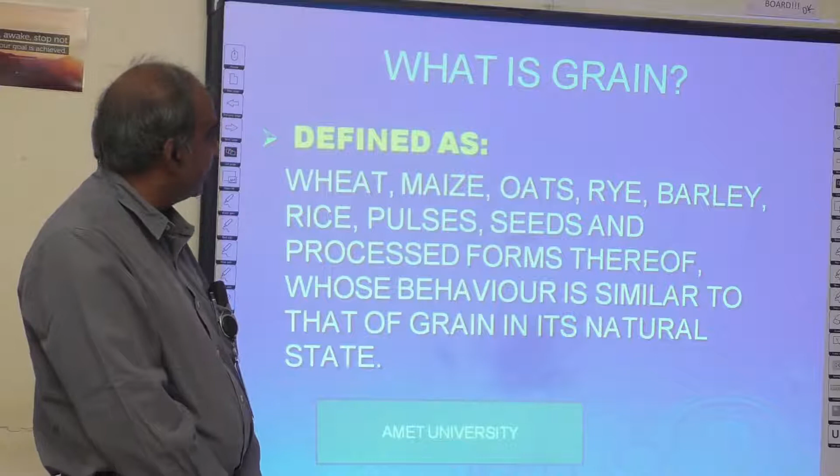Legislation. If you want to know how to load grain, IMO has got a book called International Code for Safe Carriage of Grain in Bulk. You simply follow this book and you are loaded safely.

The big question is interpreting this book. You should understand what he is trying to say and how to apply it on various types of ship.

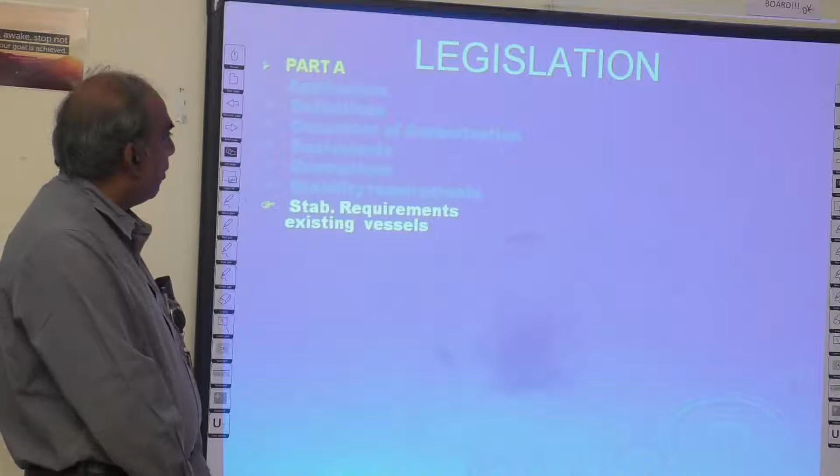Now, this book contains part A: application or definition, what are the documents required, what are the equivalents in case you want to load, what are the exemptions following this rule, what are the stability requirements in following these rules. And all this is part of your legislation contained in part A.

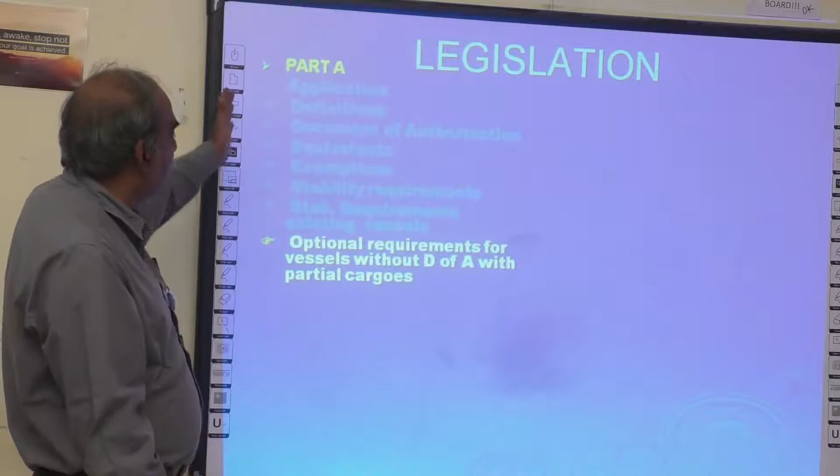In other words, if you refer to International Grain Code part A, it will discuss what are the documents, what are the stability requirements for loading grain in detail.

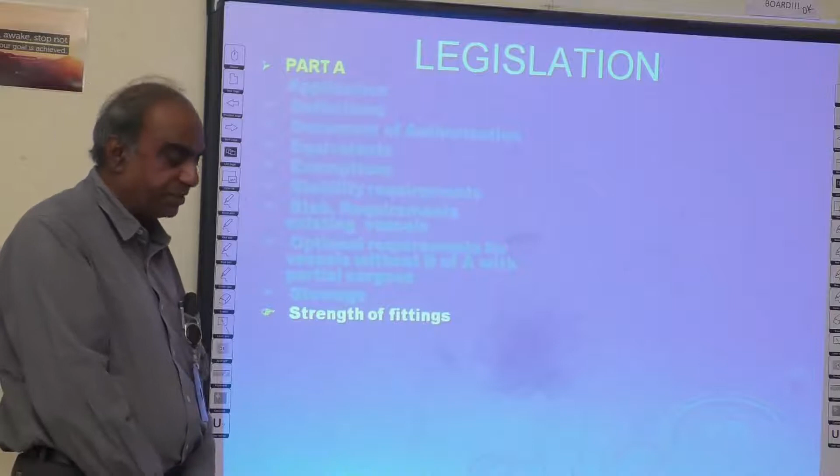Next, how do you stow this grain? Stow means placing the cargo. Securing means tying up the cargo. Grain in bulk carriers may have to be secured, that is tied up on the ship, so that if you tie it up, you may not have serious stability problem. So you are literally securing or tying up this grain, which is also discussed later.

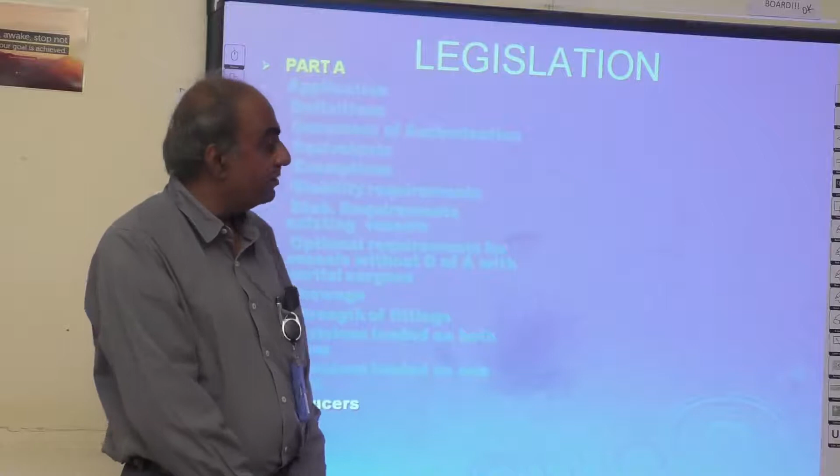What are the various methods of securing this grain? It's also discussed in the International Grain Code.

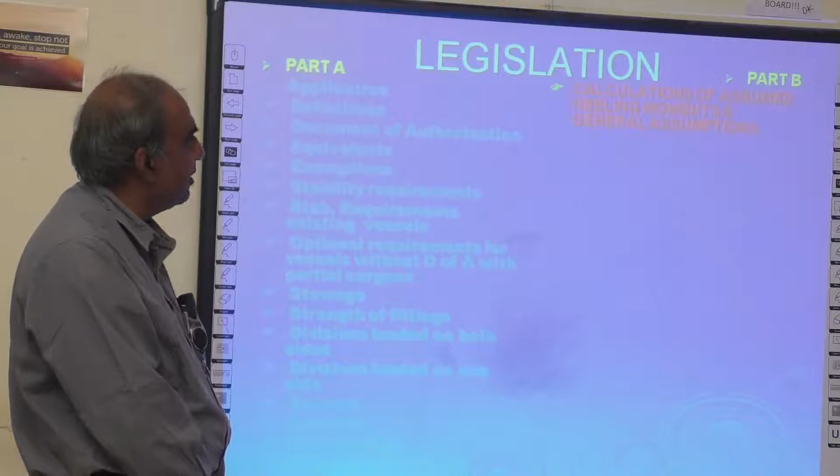Part B again, whether you have sufficient stability is discussed in part B, and part C is the carriage itself.

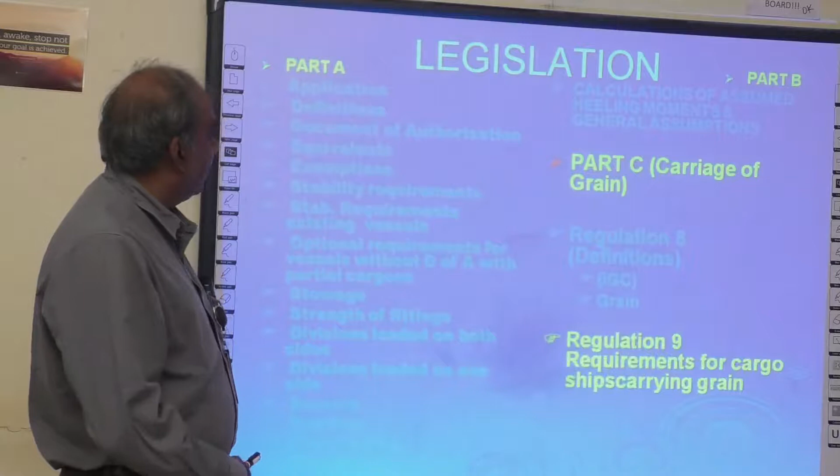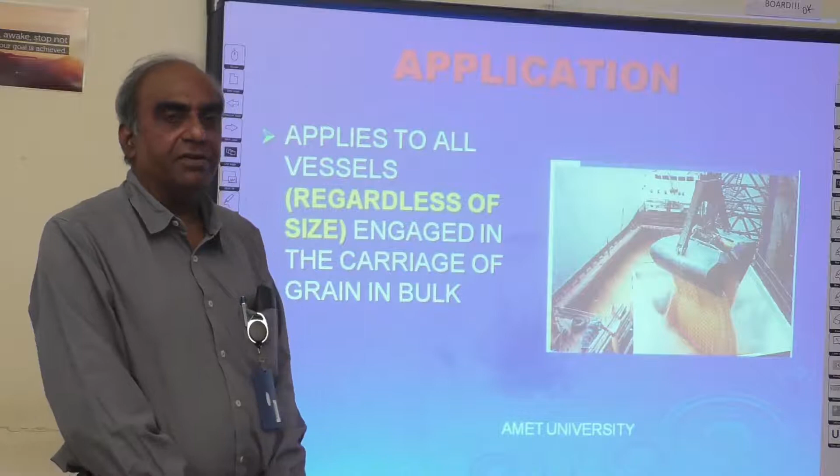Application, which ship it applies to. You will see that carriage of grain applies to all ships, regardless of size. That means, whatever be your gross tonnage. Certain rules you will see in IMO regulations applies only to ships of so and so meters, applies only to ships above 500 gross tonnage. But in case of grain, you can see, regardless of size, it applies to all ships.

What are the documents required for carrying grain? You require a document called document of authorization. Now, what is the meaning of this document? Your flag state or administration says that the ship is suitable to carry grain.

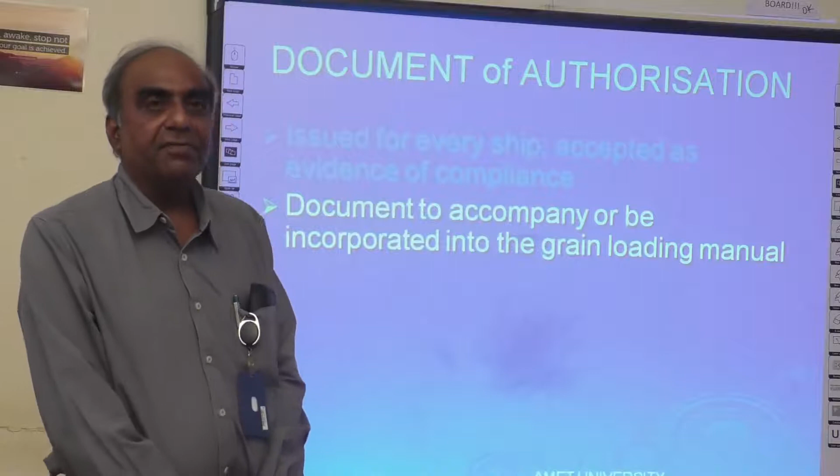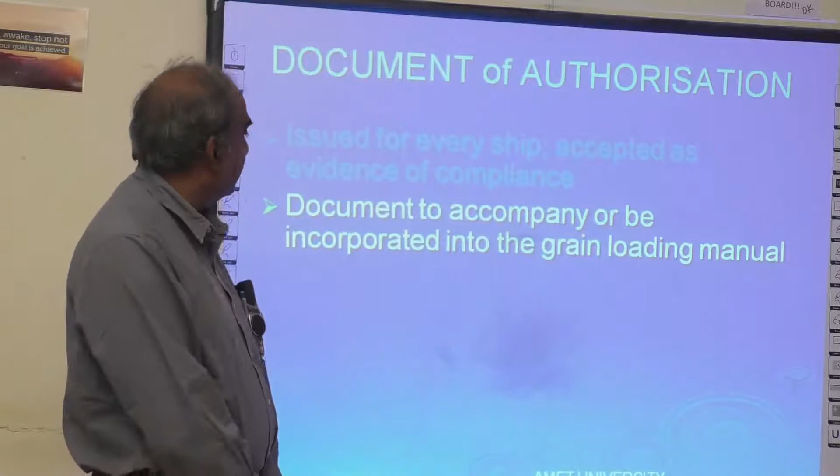Then you require a manual called grain loading manual, which basically gives you how you load the grain in each hold, and after loading, what kind of stability conditions you reach. That is called grain loading manual.

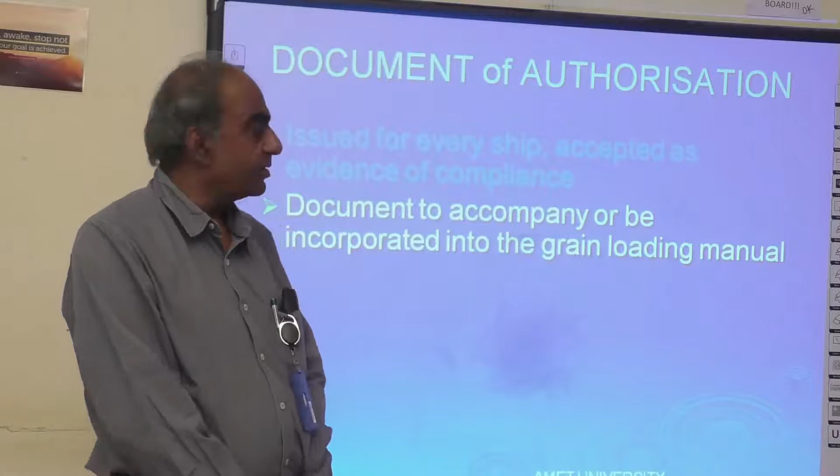It must be in English or French. I have also got recognized languages, not only English, you can also have it in French.

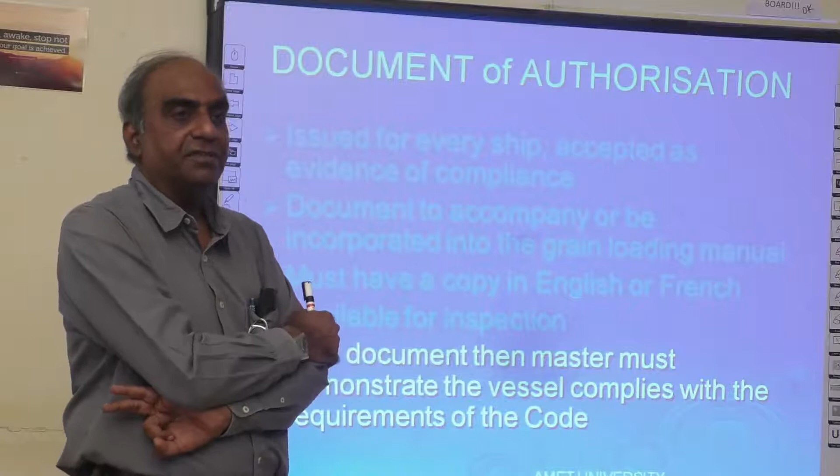If you don't have the document, can you load? The simple answer is yes. Master can load, provided he can prove to the administration that he is able to meet all the requirements which is given in the regulation, international code. Good, next.

Stability. In the loading manual, you will find everything related to stability of the ship. What are the particulars of the ship? What is the displacement? What is the free surface correction?

And the angle of flooding, hydrostatics, cross curve of stability. In other words, it is called the GZ curve or righting arm curve, which is a critical curve for your ship. From that curve, you can have an idea how your ship's righting arm and GM are behaving. That is called cross curves of stability.

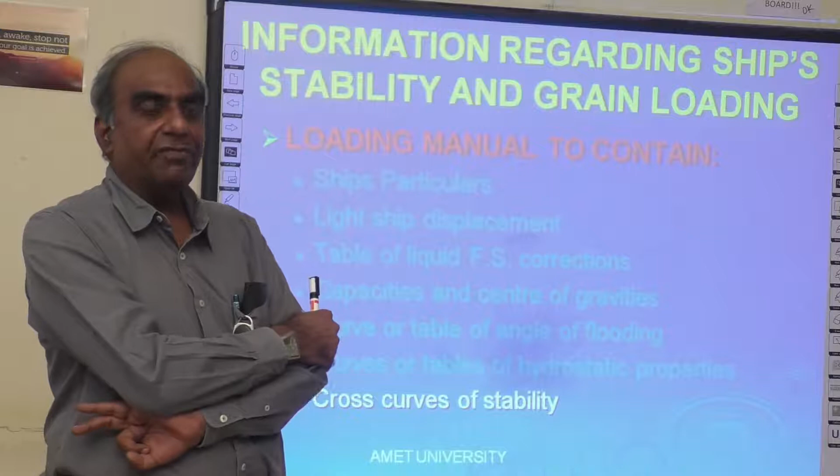There are various cross curves: ship with angle of loll, ship with negative GM, ship with positive GM. These all have got cross curves of stability. And from that you will have an idea what is the criteria for your ship as far as stability goes.

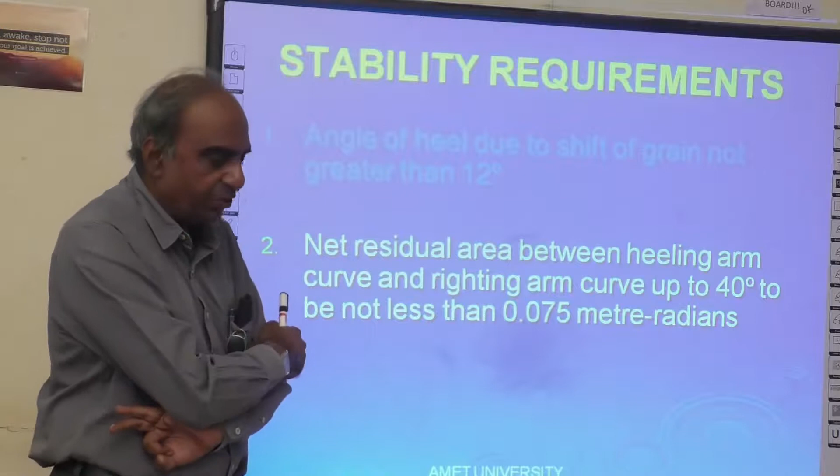So what is the stability requirement? If you load grain, you have to prove that after loading the grain, if the grain shifts - grain will shift, why will it shift? Because it settles. That is the biggest hazard of grain: whatever grain you load, it settles by itself after a voyage of about 10 days due to ship's vibration, by about 2%.

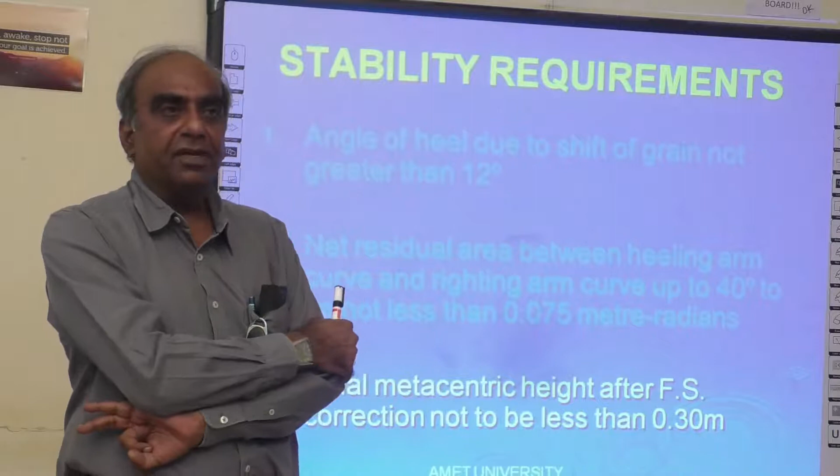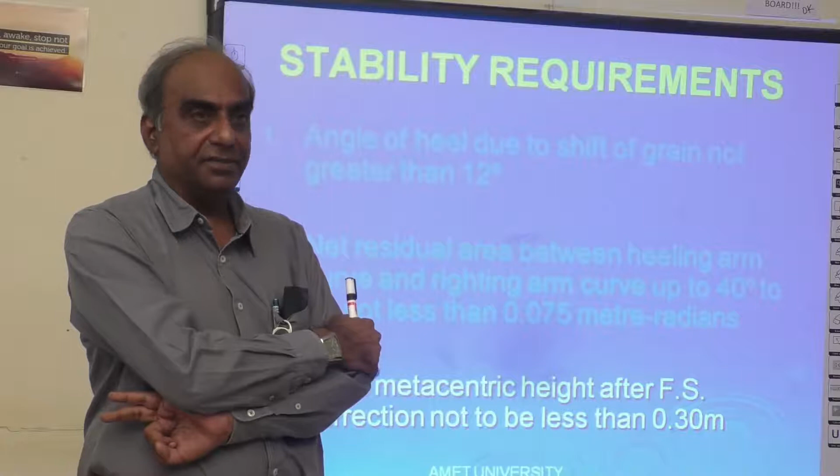That is why you assume your grain will shift. Assuming the grain shifts, I should be able to prove that my ship will not heel more than 12 degrees, which I can prove with the curve of stability, with the righting arm curve, the heeling arm curve. I will show you the cross curve of stability.

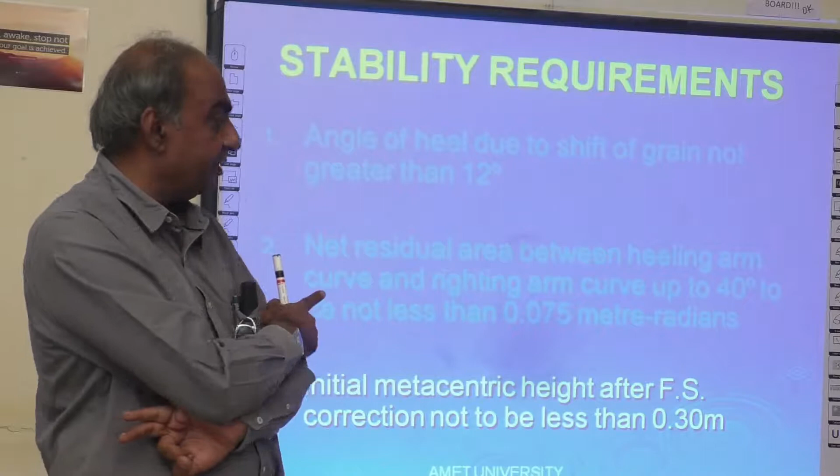And I should always have a minimum of 0.3 meters GM. Normal cargo ship requirement is 0.15, but in the case of grain, you require to have 0.3 meters, and that's after allowing for free surface.

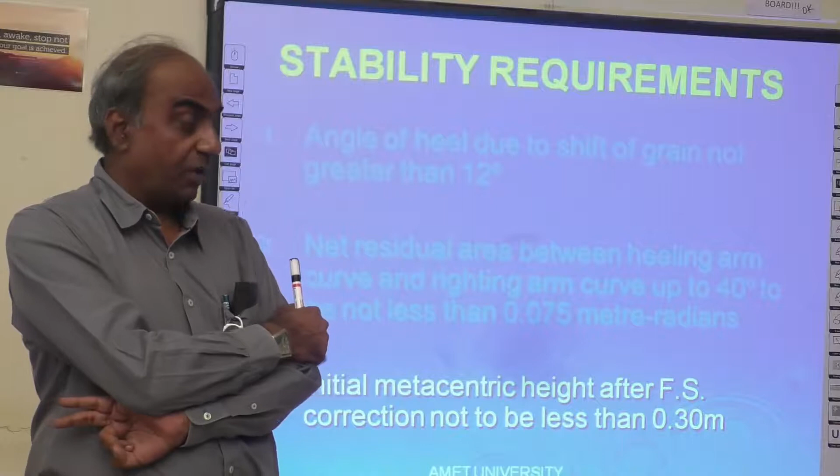Now you might ask, why is grain hazardous? Number one, it settles by itself. Number two, because it settles, it leaves empty space and creates free surface. If it is not settling, half your problem is less - you will have no free surface effect. And grain behaves like a liquid.

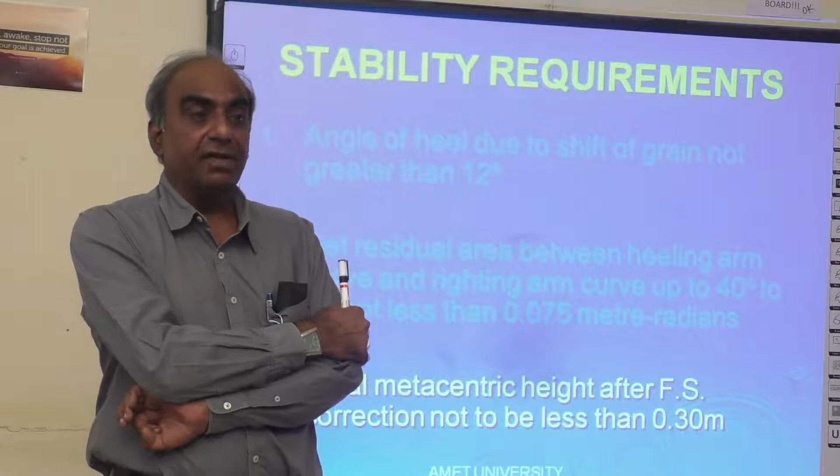Liquid itself is harmful to the ship when it is partly filled in a compartment. Therefore, a partly filled liquid tank is very dangerous for ship stability because it creates free surface effect, reduces your GM. Imagine grain itself is a cargo which can be considered a liquid. Although we are very familiar with wheat and rice, carrying wheat and rice can be very hazardous if not loaded properly on the ship.

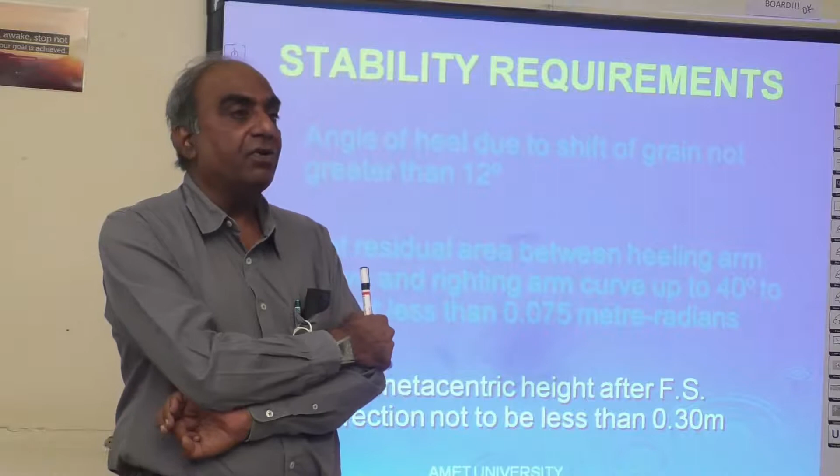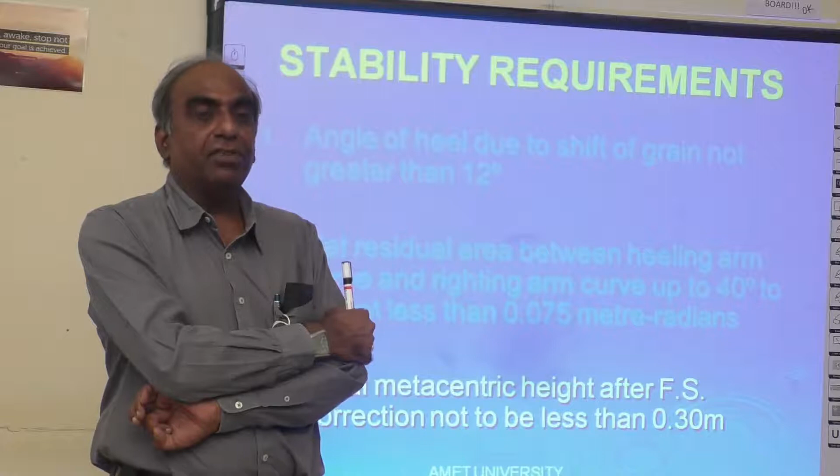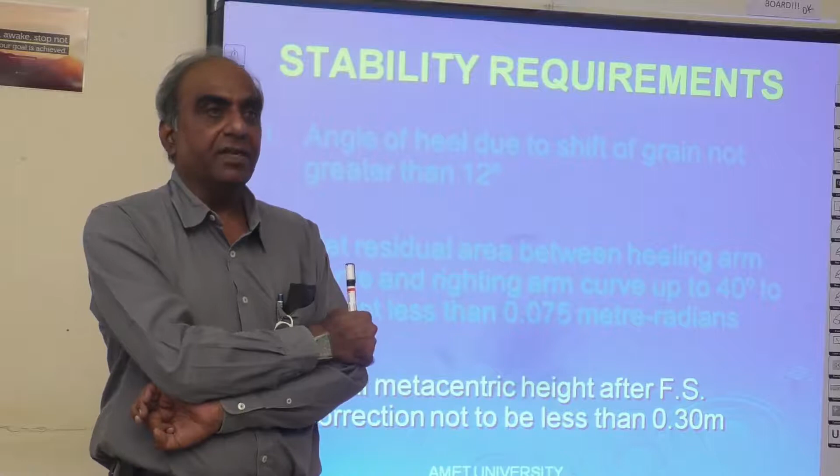Therefore, the main hazards of grain are settling of grain and shifting of grain. Both are hazardous for stability. The only way you can prevent it settling is by securing the grain. The only way you can prevent it shifting is again by securing the grain, unless you are a ship specially built to carry grain.

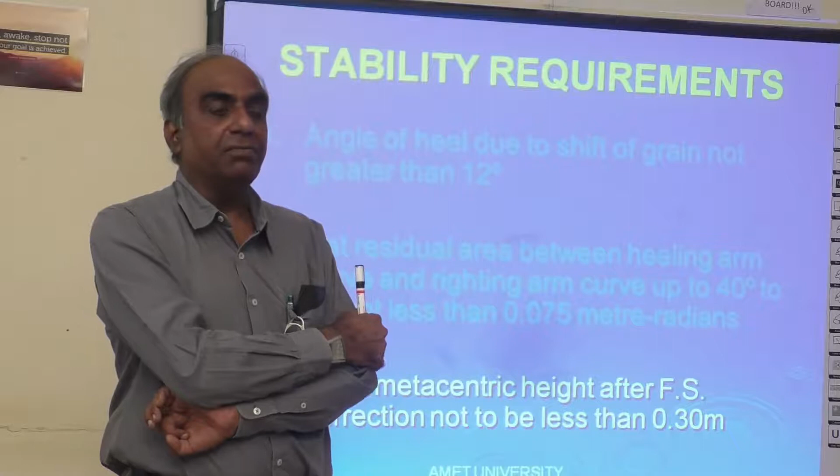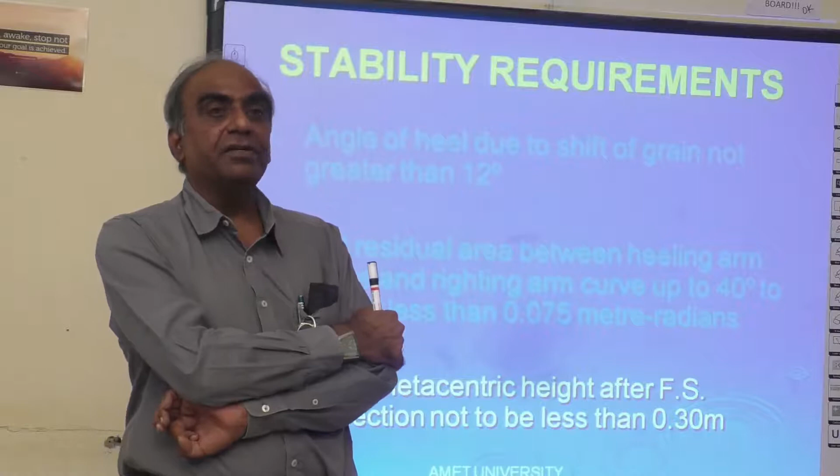For example, bulk carriers are specially designed to carry grain, where even after settling you will have minimum free surface effect because the shape of the cargo hold is designed according to the angle of repose of grain, so that once grain settles it will not leave any empty space. In all other cases, you have to secure this grain so that during the voyage it will not settle and therefore will not create free surface effect.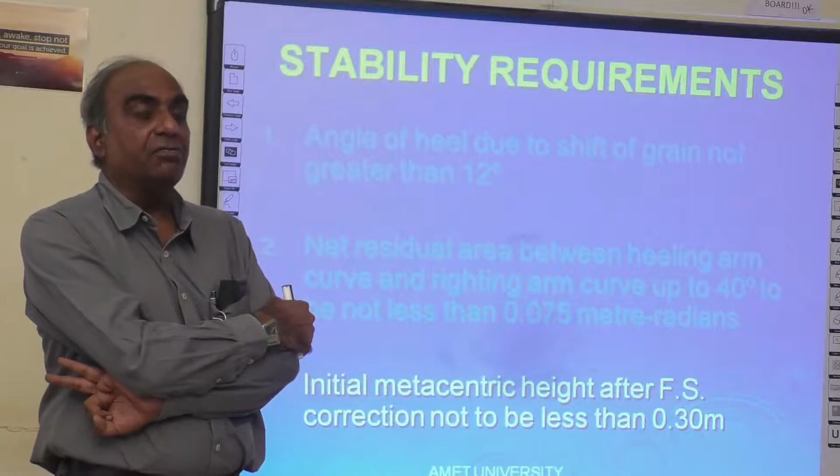So the whole idea behind this stability requirement is to make sure you have 0.3 meters GM, and make sure that even if your grain shifts by 2%, your ship will not heel more than 12 degrees. Then you are quite safe. This regulation, if not complied with, puts your ship in a dangerous situation - you cannot even reach port.

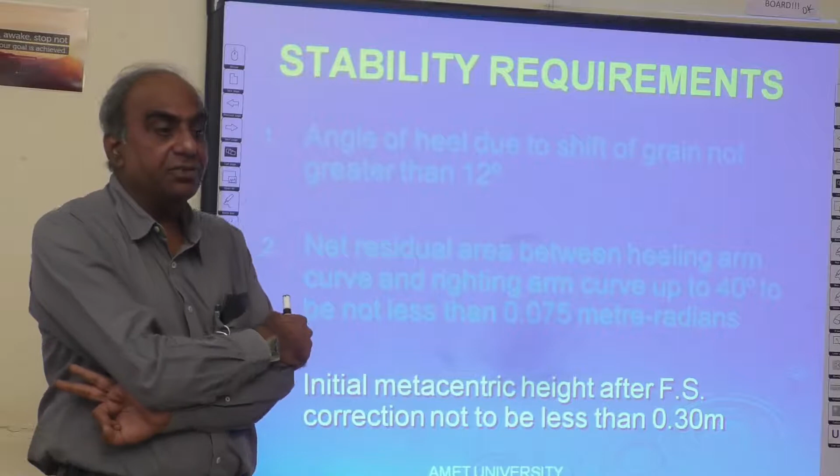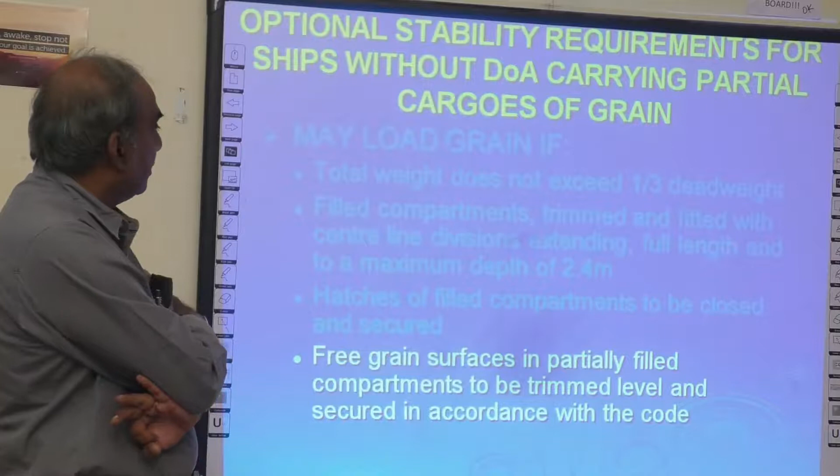So what happens? There was a rule so you can load grain. There's an old rule that in case you don't have a document of authorization, no problem - just load 1/3 of your ship's deadweight, show it to administration, and sail out with 1/3 deadweight. Less hazard, and even your stability calculation is simplified, as given in the International Grain Code.

This was for ships built somewhere before 1980. This rule was there, but very few ships today comply with that, and either they load full or don't load at all.

But if you have a full load of grain and don't have the document, no problem. Do the stability calculation, prove that you are complying with the grain code, fax it to your administration. They will approve it, get back to you, show it to the port, and then you can sail out. Once you've proved to the port that your stability complies with the International Grain Code, there are no problems at all.

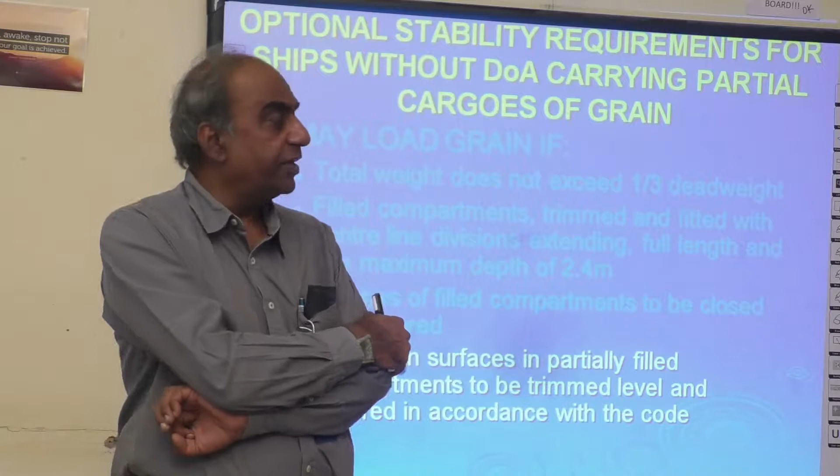Alternatively, if you are only 1/3, you don't even have to show the calculation to your administration. Show it to the port, show them this is your stability meeting the requirement, and they will let you sail out. Remember, the port will not let you sail if your stability calculation is not meeting the regulations.

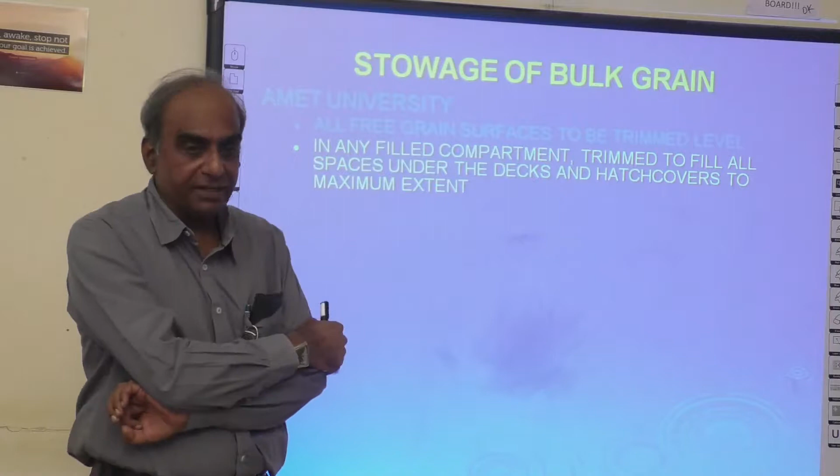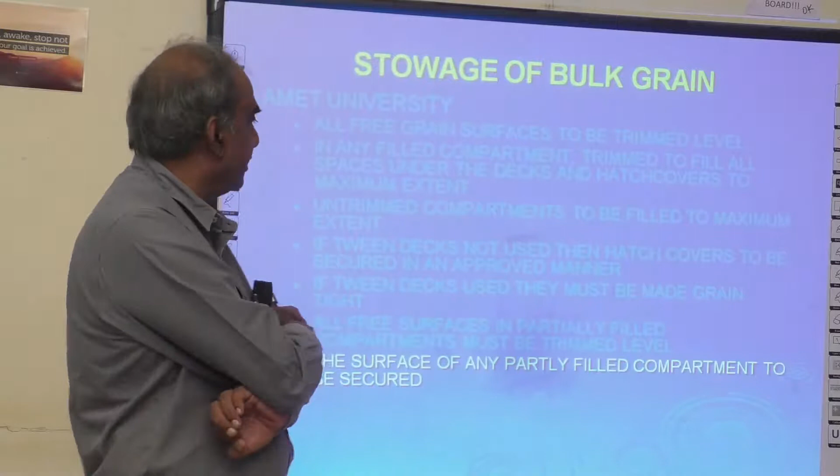So your grain loading method can be very helpful. Now, how do you go about stowing? Stowing is filling up, and trimming the cargo level is very important. Level it properly, otherwise it's likely to shift. That is called trimming the cargo. Even in a general cargo ship, as far as possible, bring it fully to the top. That is called fully trimmed.

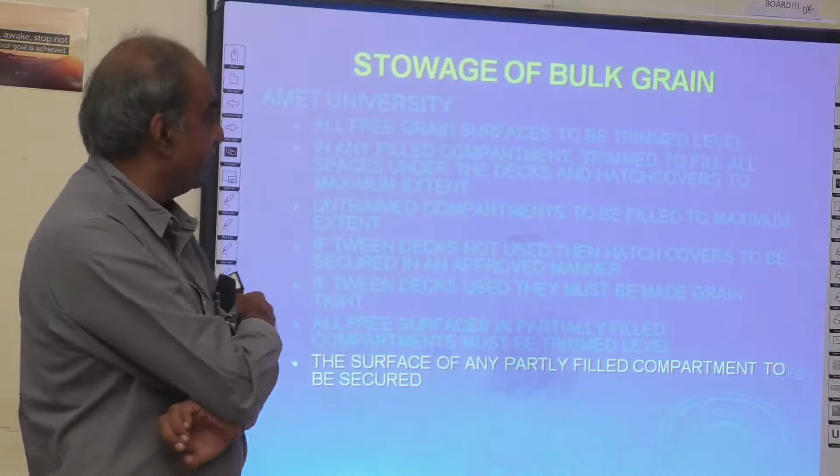Otherwise, fill it half or 3/4, which is called partly filled. You may not always be able to fill it full because cargo is less, so it's called a partly filled compartment. This depends on your draft, quantity of cargo, stability calculation, and so on.

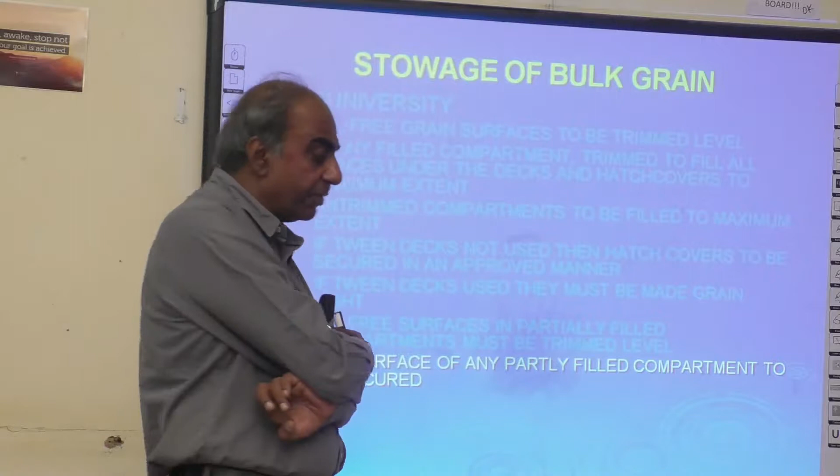Either way, whether full or partly filled, regulations say for a general cargo ship you have to secure this cargo in order to meet your stability requirements. If you are a bulk carrier, you may or may not have to secure it, depending on what sort of condition you are arriving at.

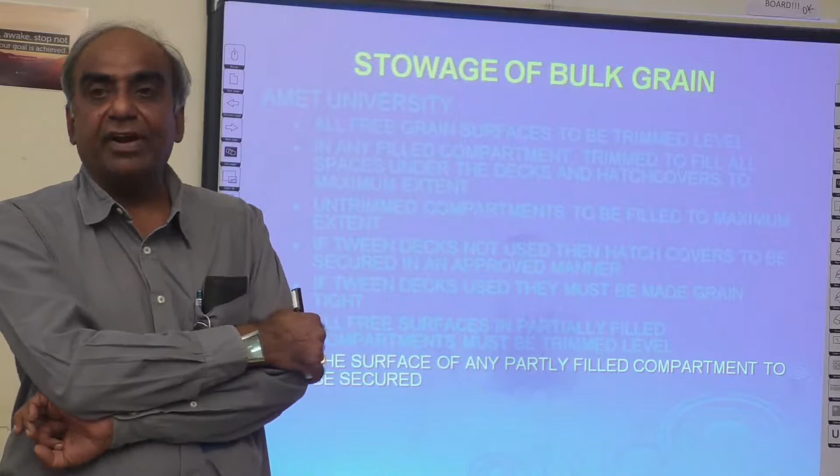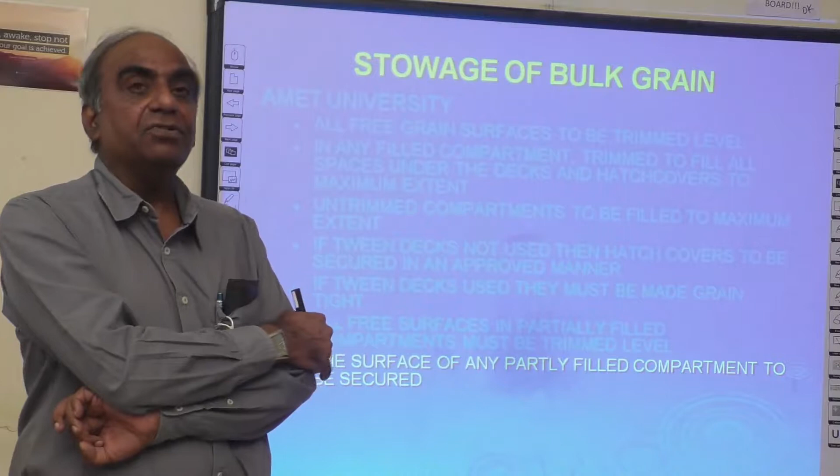You may just keep one or two holds partly filled and the stability may still be alright. Then why waste time and money securing it? But general cargo ships, generally, whether full or not, you have to secure it. That is why he has given you a method for securing filled compartments and partly filled compartments.

Next, how do you secure? If it's a filled compartment, they normally do a thing called saucering. That is, they make a bag in the middle like this. Make a saucer - find some bags, fill it with grain, put it in the center like this, and tie up the hole. Of course, there are basic requirements.

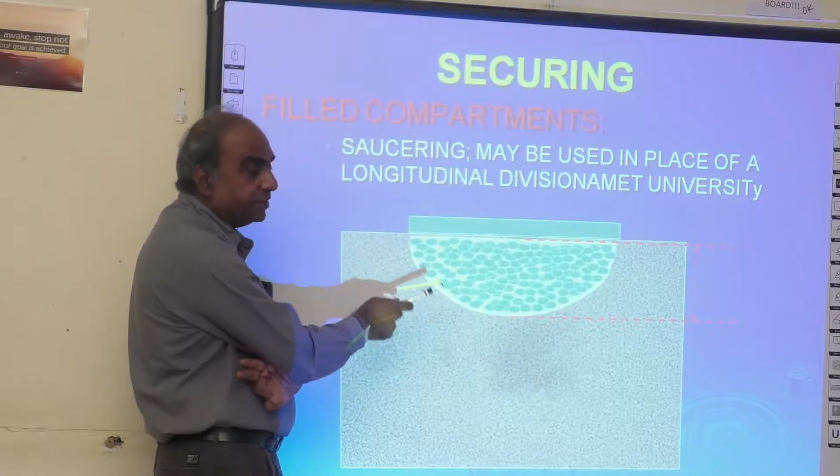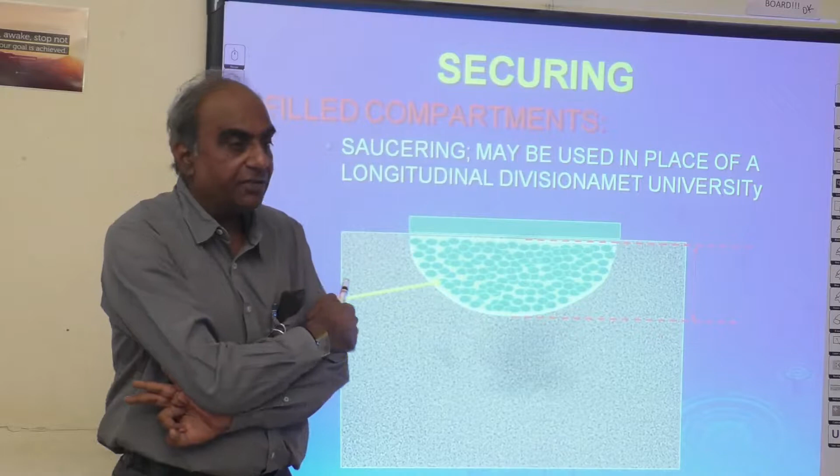What should be the depth of this? In order to meet the instructions, we may have to follow this. But the basic idea is: make a saucer, fill it in bags, put it in the middle. This grain will not settle during the voyage, and therefore you will not have free surface effect, which takes care of your stability. This is if the compartment is full. Regulations say for bagging, make about 1.2 meters depth of saucer.

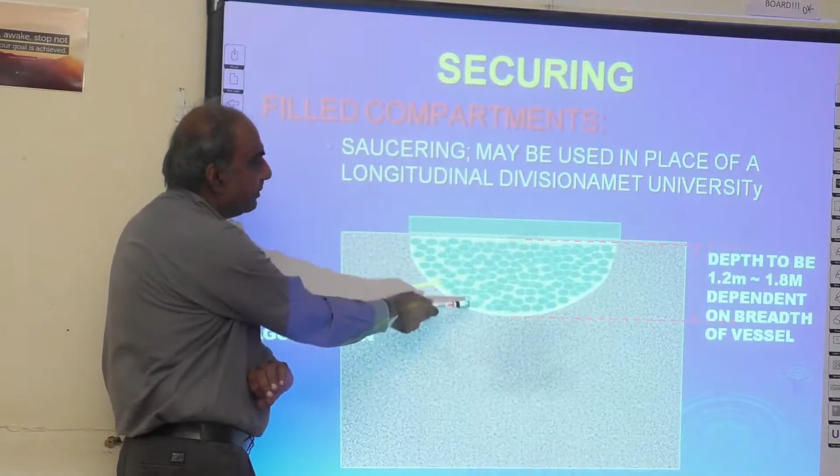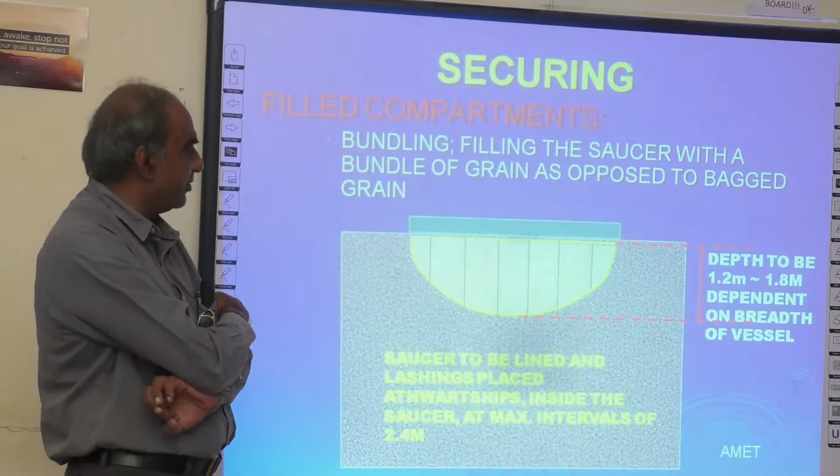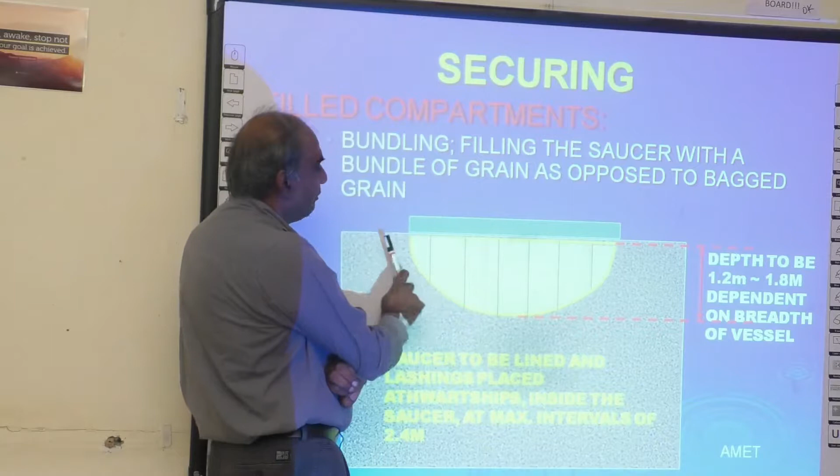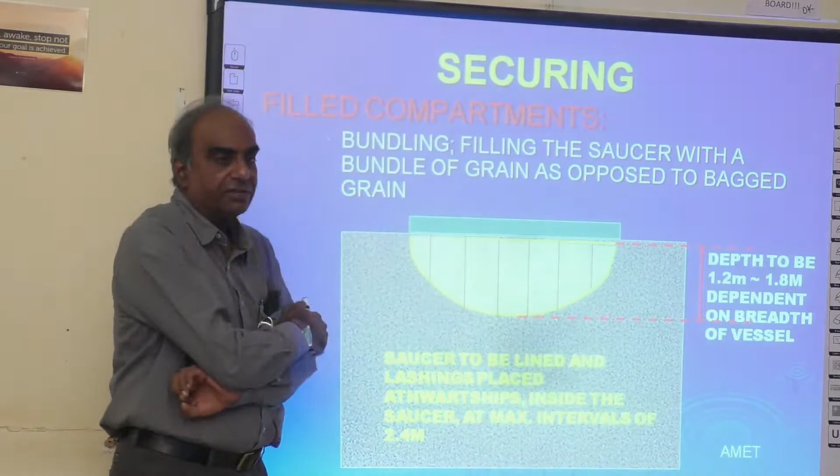Now, if it's a filled compartment, another method is you bundle up the grain. This is also given clearly in the International Grain Code. It is the same idea as bagging, but instead of wasting money and time on bags - which can be expensive - you put some wood, wire ropes as given here, put some lining material, and then catch the whole thing with a wire and tighten it down. This way the grain will not settle during the voyage, and therefore we will not have stability problems. This is called bundling, whereas the previous case was called bagging.

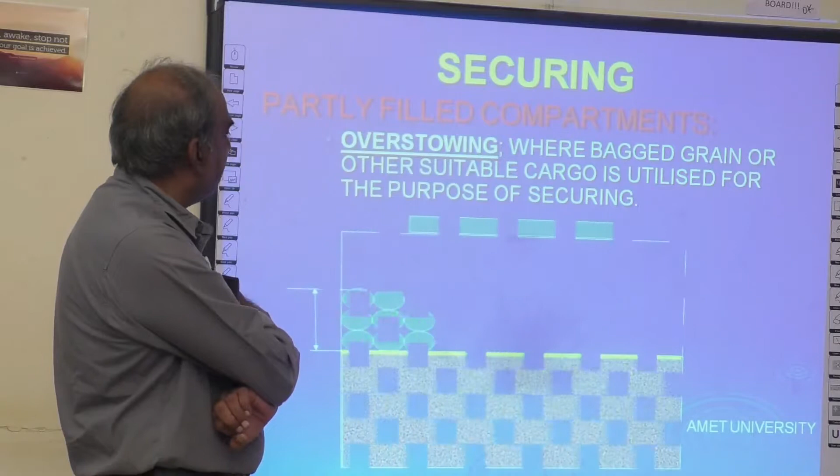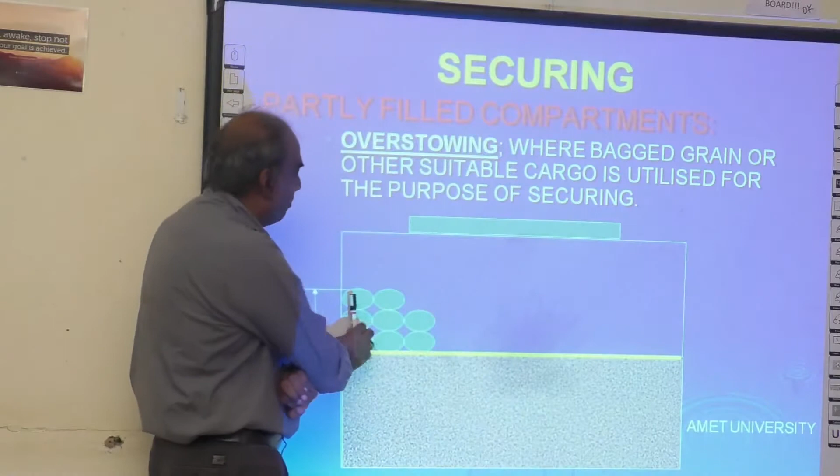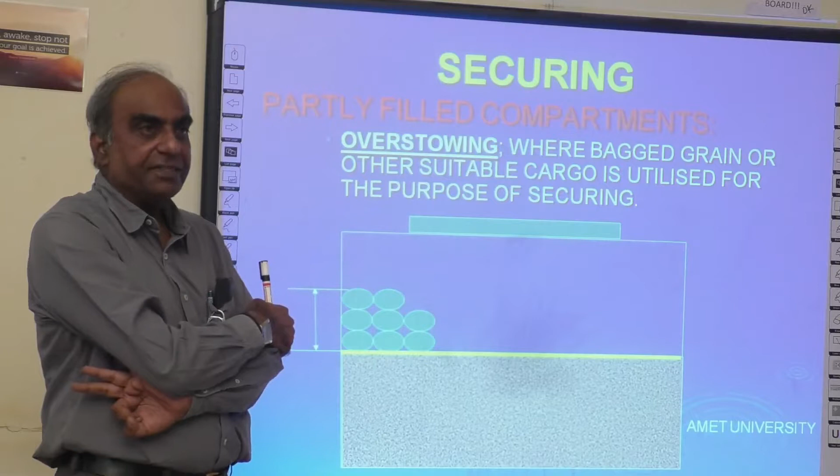If it's partly filled - the hold is not full, you have part grain - you still have to secure it, and the code would check. You can overstow bag grain up to a particular height given in the code. This way the grain cannot shift, it cannot settle, and it takes care of your stability. This is called overstowing the grain.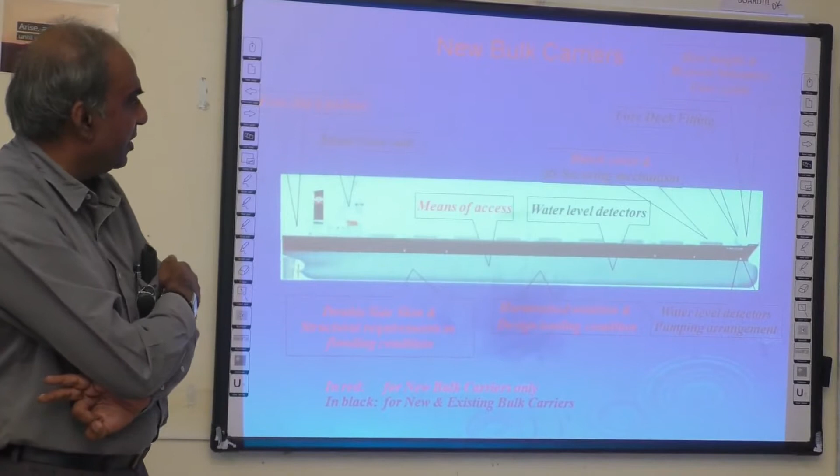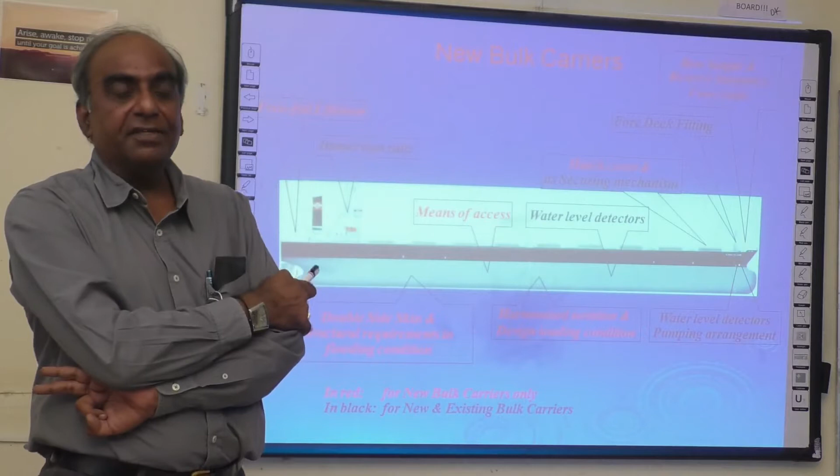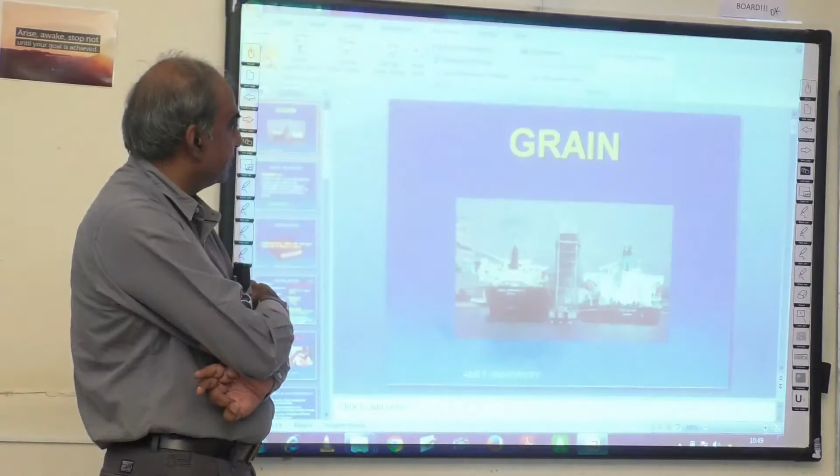Now, if it's a bulk carrier like this, you may not require any securing at all. These are bulk carriers specially designed to carry grains, and therefore the tanks themselves are such - they are called self-trimming - it will make sure the grain does not settle during the voyage. That's it, so much for grain. As I said, for all regulations, please refer to the International Grain Code in detail.